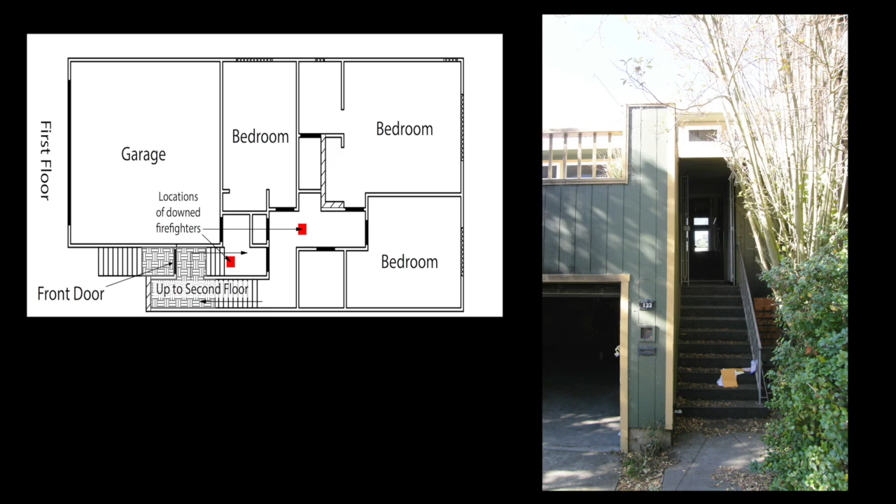At approximately 10:54, about 6 minutes after the arrival of Engine 26, Battalion Chief 9 followed the Engine 26 hose line up the front stairs, into the front door, and then down the stairs to the first floor or street level of the house. Battalion Chief 9 had a face-to-face discussion with the victims.

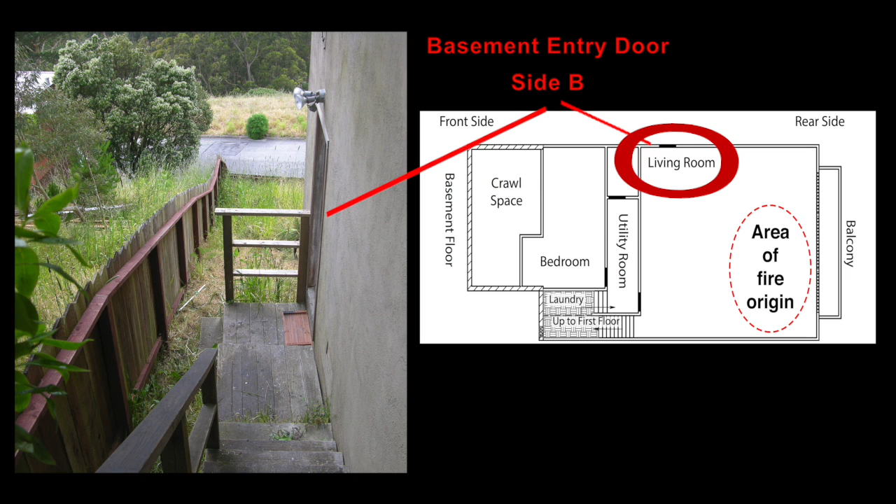During this discussion, Engine 26 confirms that the fire is below them, and Battalion Chief 9 indicates that the attack will be made from the basement level on the B side. The battalion chief exited the building.

Engine 26 remained in position near the top of the stairway leading into the basement. This was the last communication with the Engine 26 crew members inside of the structure.

Within 11 minutes of Engine 26's arrival on the scene, the large windows that made up most of the C side wall of the basement level began to fail due to heat from the fire. As the windows broke, fresh air mixed with hot fuel-rich gases in the basement, which increased the heat release rate of the fire. This resulted in the rapid failure of the 6 window panels.

It took less than 2 minutes for all of the windows to fail.

After the rear basement windows began to self-vent, Engine 24 and Rescue 1A tried to make entry through the pedestrian door in the garage to attack the fire, but they were forced back by extreme heat and heavy black smoke.

With the pedestrian door between the garage and the first-floor hallway open, heavy black smoke began flowing out of the open garage door at street level on Side A.

Within a minute of this change, the Side B door on the basement level was forced open. Battalion Chief 9 reported heavy fire and smoke. Engine 11 tried to make entry into the basement, but they were forced back by the heat.

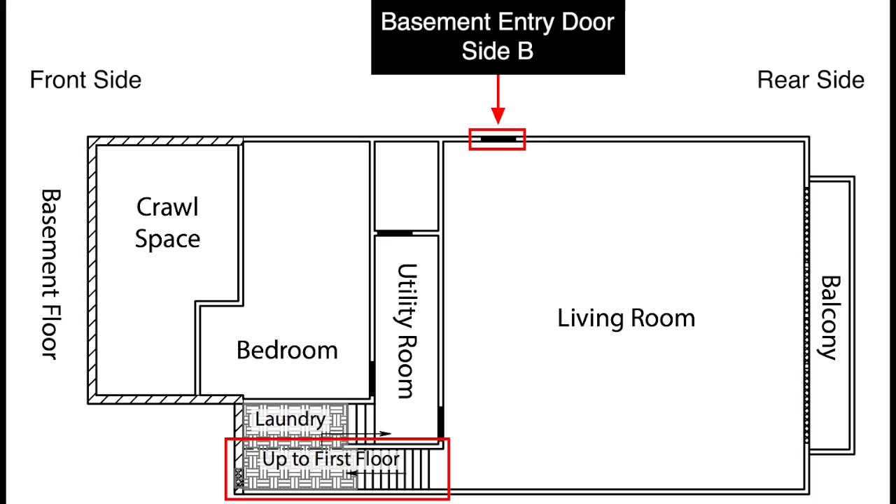Battalion Chief 9 requested a second hose line. Incident Command attempted to contact Engine 26 several times via radio, with no reply.

By 11:02, both Engine 11 and Engine 32 had made entry through the Side B door into the basement and initiated suppression operations. At approximately 11:08, the lieutenant and firefighter paramedic from Engine 26 were found in the first-floor hallway.

They were found between the top of the stairs from the basement level and the door to the garage. Both of the Engine 26 crew members died of their injuries sustained in the fire.

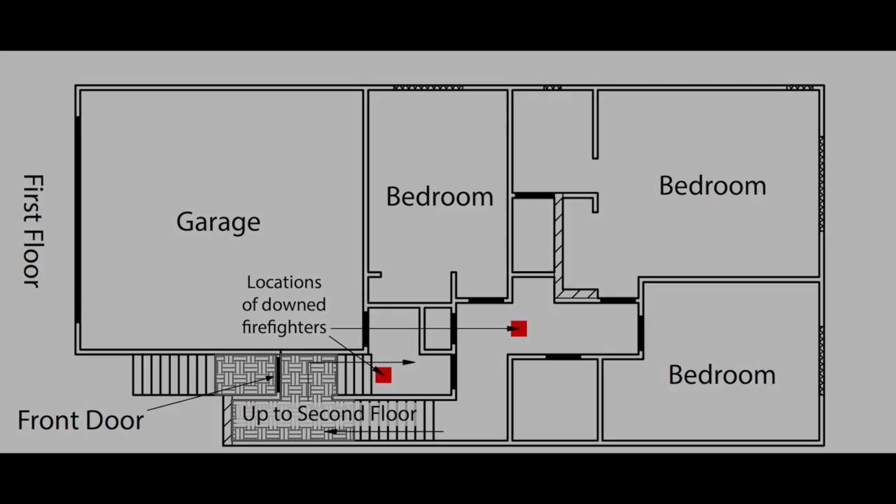NIST's Fire Dynamics Simulator, or FDS, was used to provide insight into the dynamics of this structure fire. The results of an FDS simulation are visualized with another NIST program called SmokeView. The inputs and details for the FDS simulations are documented in NIST Technical Note 1856.

The fire started in the basement, near the balcony windows on the rear of the structure. The fire spread to a large sectional sofa in the center of the basement living room area.

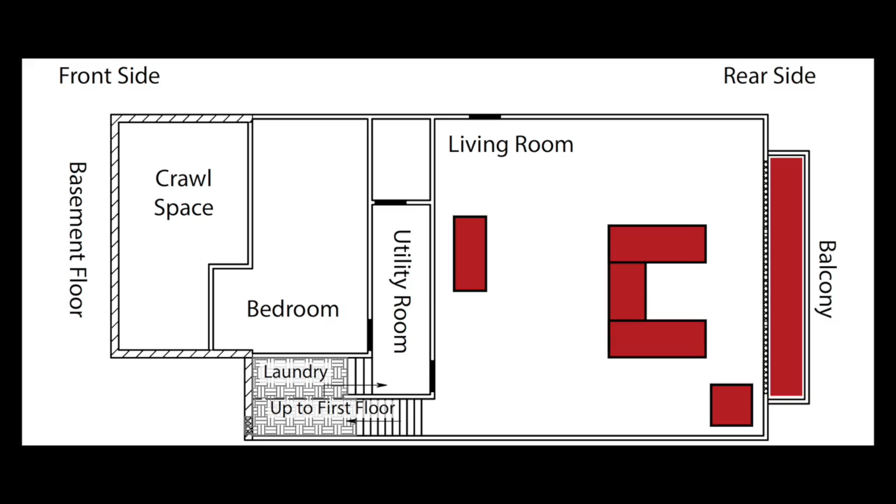Based on an assessment of the fuel load in the burned area of the basement, the estimated peak heat release rate of the furnishings and interior finish was approximately 20 megawatts. However, the lack of oxygen limited the fire growth until the rear basement windows vented.

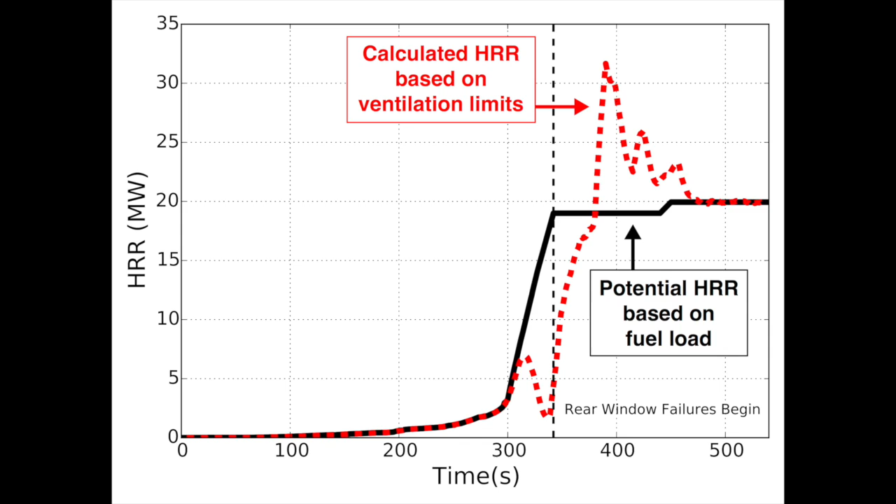As seen in the heat release rate graph, after the windows failed and allowed additional oxygen to mix with hot fuel gases in the basement, the fire rapidly increased from less than 5 megawatts to more than 25 megawatts in less than a minute after the first window self-vented.

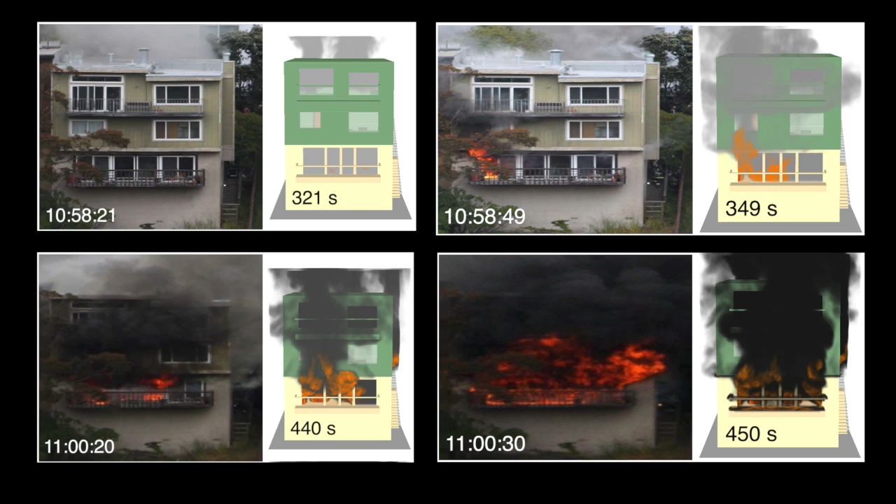The comparison of photographs from the incident and images from SmokeView shows the rapid fire growth initiated by the uncontrolled ventilation of the rear basement windows. The photographs show the fire incident time, while the SmokeView images show the simulation time.

The comparison of a photograph from the incident and from the simulation shows the condition on the front side of the house at street level, as the rear basement windows were self-venting.

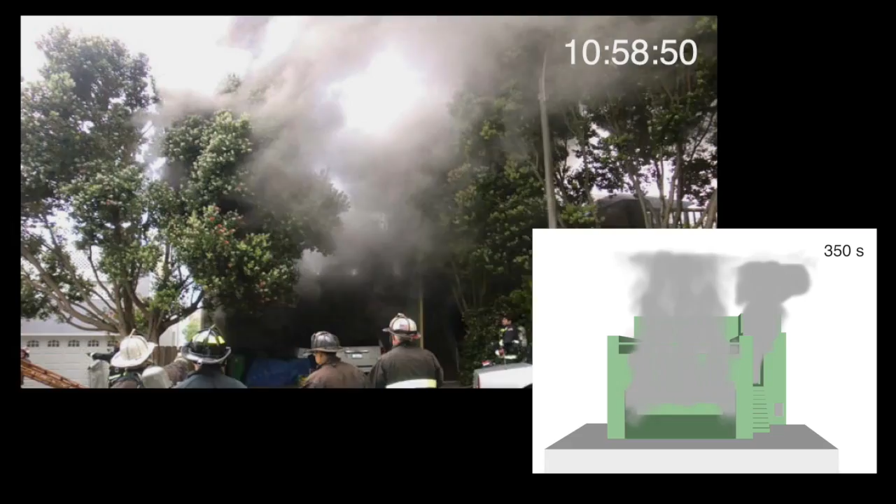Now we will use output from the simulation to understand the flow path within the multi-level structure. Fire gases move from regions of higher pressure to regions of lower pressure.

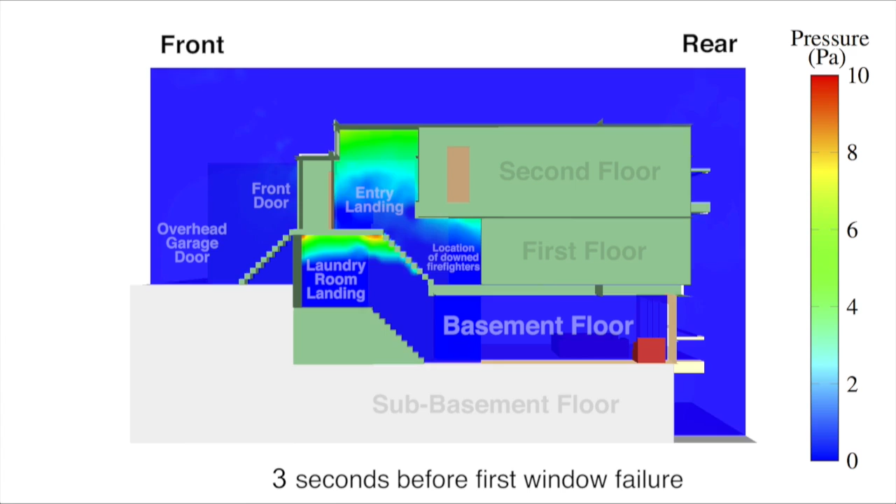This video shows the pressure plane along the center of the stairway from the basement to the laundry room landing between the basement and the first floor. An estimate of the pressure increase is shown before and after the first basement window failed.

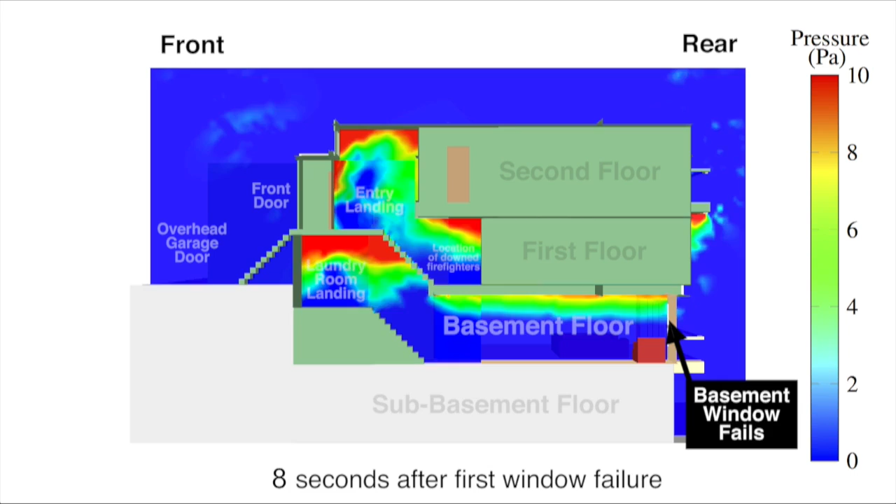This video shows the pressure plane along the center of the stairway from the basement to the laundry room landing between the basement and the first floor. An estimate of the pressure increase is shown before and after the first basement window failed.

One of the hazards to firefighters located in the exhaust portion of the flow path is convective heat transfer from the fire gases. Convective heat transfer depends on the velocity, the amount of turbulence, and the temperature of the fire gases. This video shows a comparison of gas velocity estimates in the stairway before and after the basement windows self-vented.

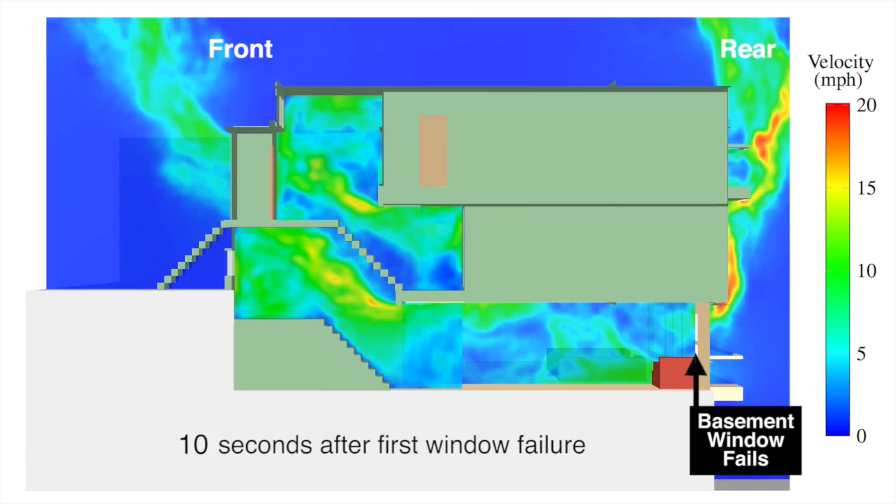Another way to visualize velocity with SmokeView is by using arrows or vectors. In this video, the vectors show both gas flow direction and gas flow speed. This is also representative of the amount of turbulence or mixing within the flow path. Notice the gas flow circulation pattern on the landing, which indicates a very turbulent or well-mixed flow.

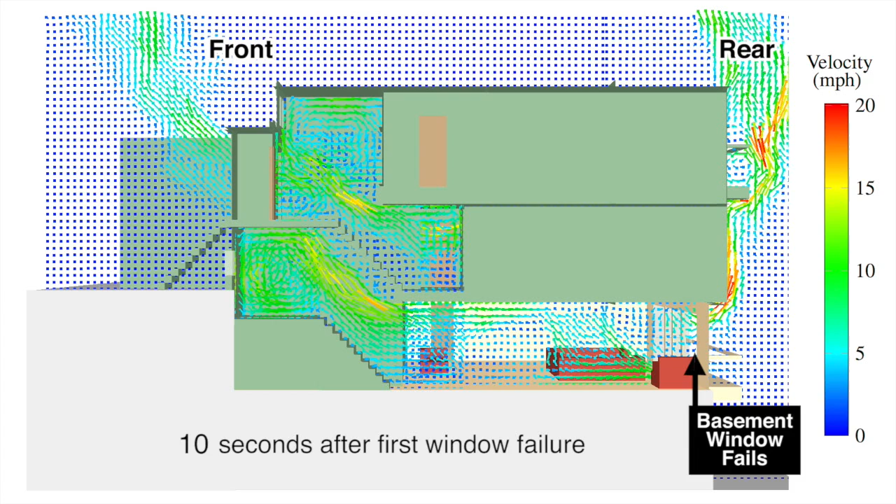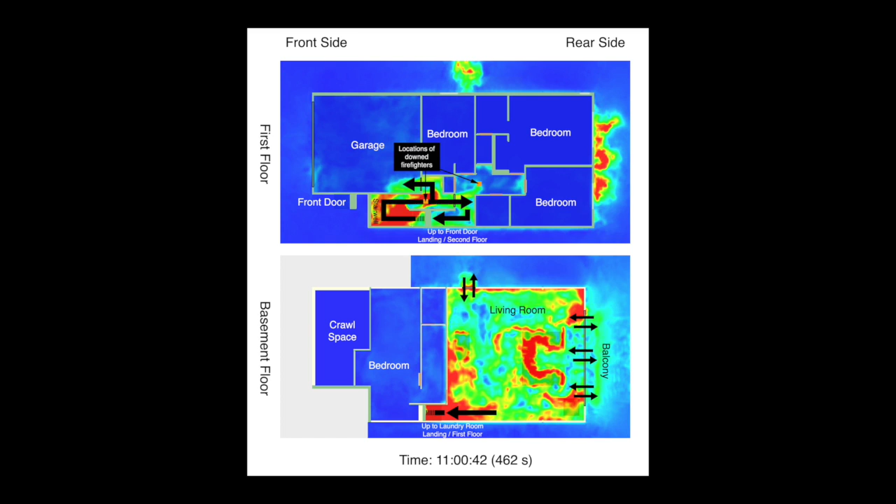These images show the flow path from the fire on the basement level 2 minutes after the first basement window failed. At this time, all of the rear basement windows have failed. The hot gases in the basement are flowing up the stairwell, then splitting on the first floor, with some of the flow continuing up another stairwell to the open front door, and the rest of the hot gas flow moving out of the open pedestrian doorway through the garage.

Notice that the open basement windows on the rear of the house serve as bidirectional vents, with fire gases exiting the upper portions and air entering the lower portions. While on the front side of the house, the front door and the door to the garage are unidirectional vents, serving only as an exhaust for the fire gases.

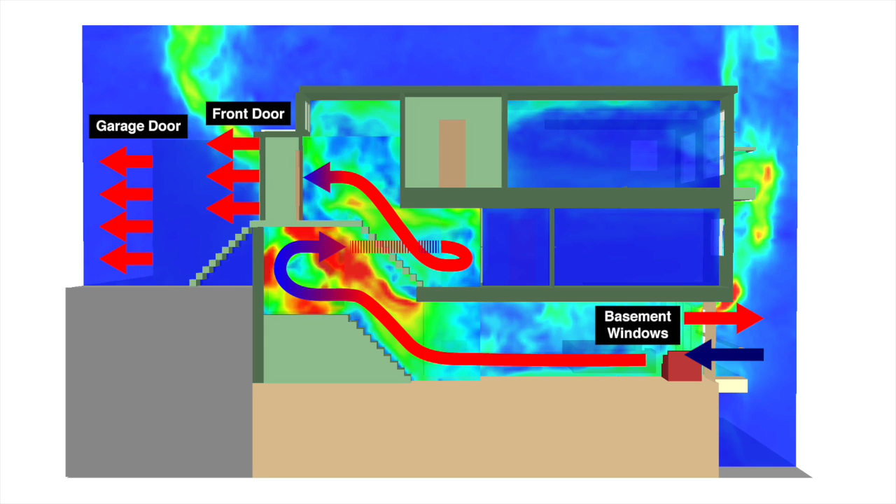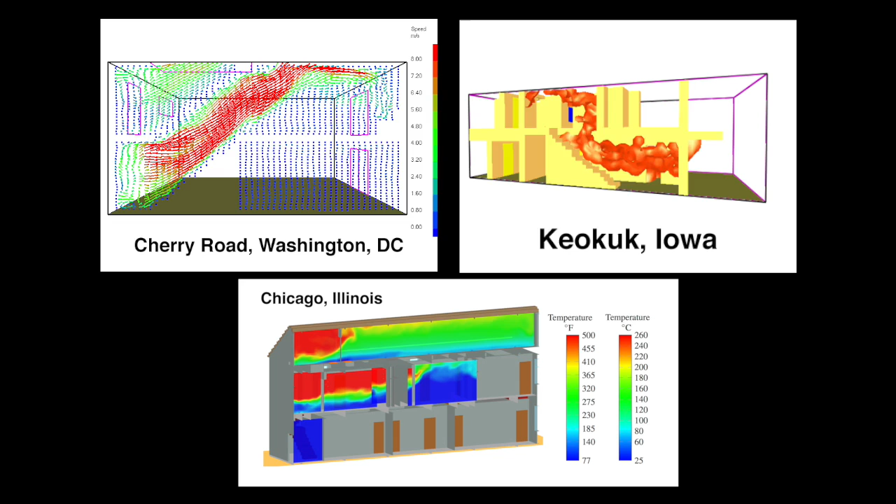There have been many previous fire incidents in which changes in the flow paths have had an adverse impact on firefighter and occupant safety. Fires with rapidly developing or changing flow paths are a significant hazard to firefighters. The development of a flow path could be caused by the failure of a component of the structure, such as a door, window, or portion of a ceiling, wall, or floor.

Environmental conditions, such as wind, can generate hazardous thermal conditions within a flow path. Stay upwind of the fire or keep the wind at your back. Uncoordinated ventilation or uncontrolled doors can also be the cause of increased thermal hazards within a flow path.

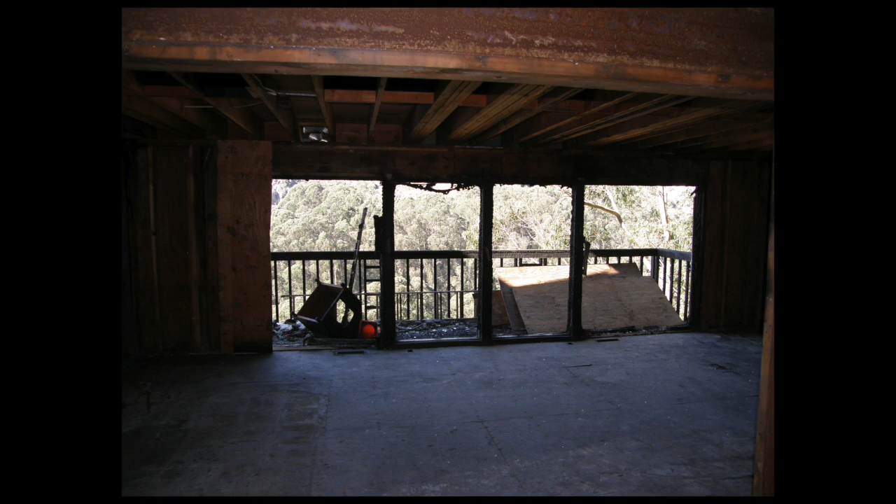In this fire incident, the thermal degradation of vinyl-framed windows and sliding glass doors resulted in the self-venting of a wall of windows 19 feet wide on the rear basement wall. The window opening allowed hot gases to flow out of the windows and mix with oxygen, which enabled the fire to spread up the rear of the structure.

Oxygen entrained into the structure enabled additional fire growth in the living room area of the basement. Failure of the rear windows resulted in a rapid increase in temperature, velocity, and mixing of the fire gases in the stairs and the first floor hallway. Conditions changed from tenable to untenable within seconds.

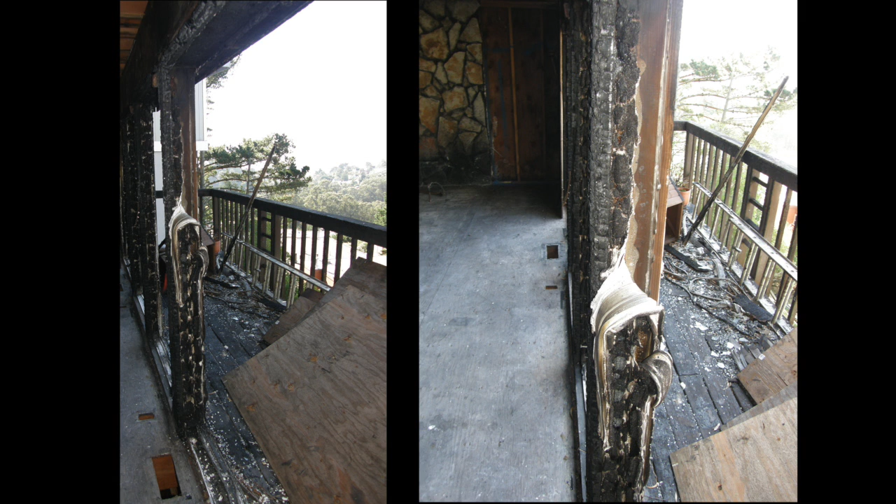Prediction of the failure mode and failure time of a building component is not a reasonable expectation given the large number of unknowns that firefighters face on the fire ground.

Research has been conducted by NIST and UL with fire departments across the country on exterior fire attack. The studies have shown the importance of scene size-up prior to beginning interior fire operations in order to choose tactics that would not only be the most effective, but also increase the safety of the operations.

The experiments in single-family homes have shown that once the basement fire was located during size-up, the most effective fire attack was made from the same level.

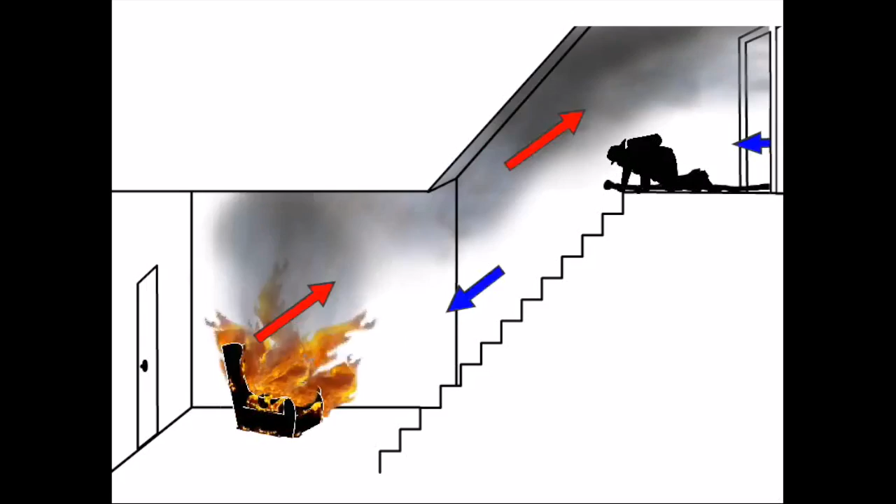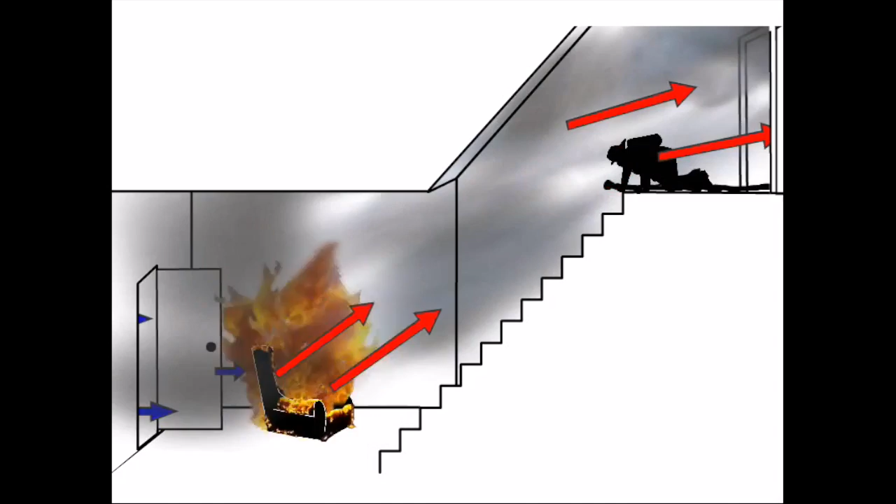When sizing up a structure fire, choose your tactics with potential flow paths in mind. Recall that in a flow path, the hot gases move from a region of higher pressure to a region of lower pressure. Firefighters located in the flow path downstream of the fire can be exposed to lethal levels of heat. Firefighters positioned in the flow path above the fire are in a high hazard and potentially deadly location. It is critical that tactics are chosen so firefighters are not caught in this position.

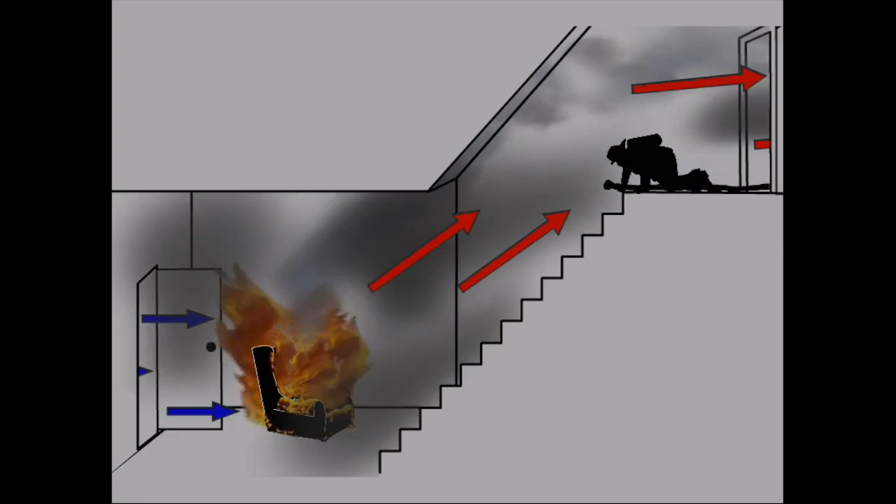For more information on this incident, see NIOSH Report 2011-13, San Francisco Fire Department Safety Investigation Report, Incident 11050532, and NIST Technical Note 1856.